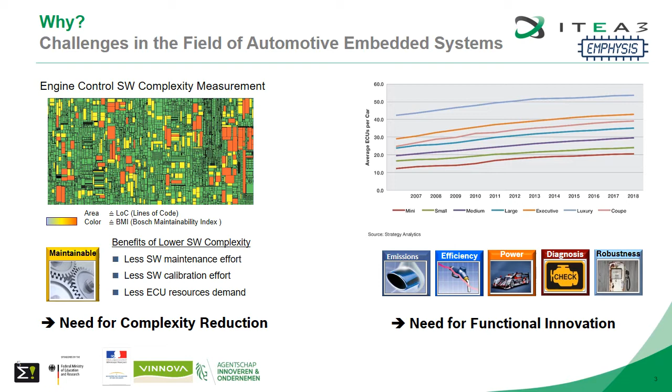The motivation for Bosch Corporate Research to initiate this project back in 2015 was driven by the business needs expressed by our industrial partners in the Bosch business units. A growing software stack whose complexity has become a threat in terms of maintenance costs and the limiting factor for new innovative functions for systems of an increasing complexity. New ways of developing embedded software in a faster and more sustainable way was the ambitious project goal.

Starting point of the eFMI approach is the observation that understanding how things work is fundamental for developing successful products. Modeling and simulation has been used over decades to build up and utilize this knowledge. Thousands of engineers at Bosch leverage simulation techniques to build the high-quality products we are selling worldwide.

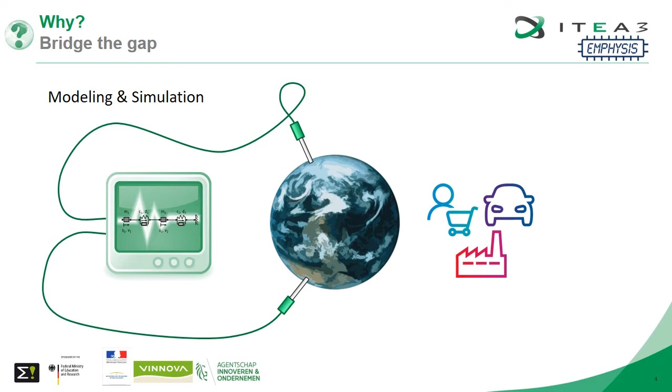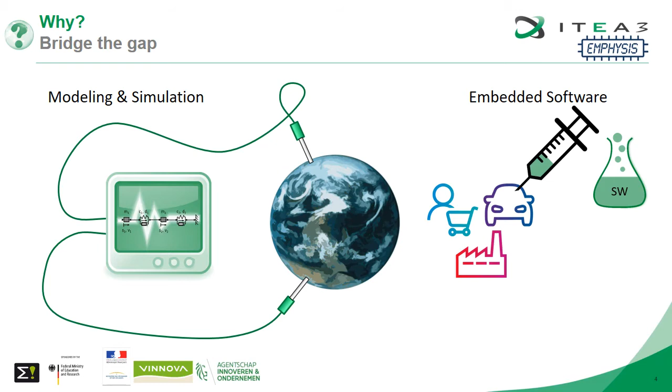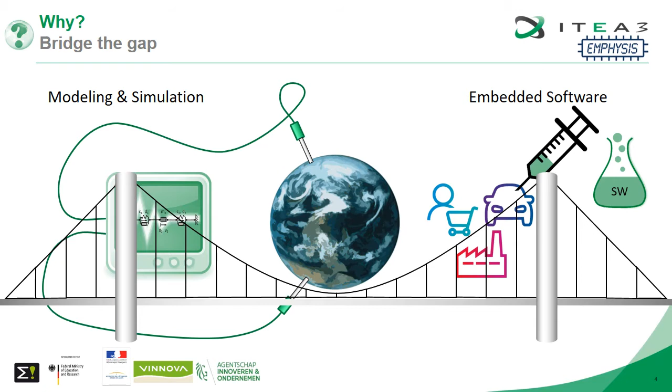With code being the fuel of the 21st century, software has become a driver for new innovations for smarter products. Finding ways to dissolve simulation models into software to inject them directly into the products is the key to derive advanced functions faster. Bridging the gap between the modeling and simulation domain and the embedded software world is the core idea behind the EMPHYSIS project, leading to eFMI as new exchange format between these domains.

The idea has not only been specified on paper in form of the eFMI specification, but also realized by a large number of tools, from modeling tools over ECU code generating tools to validation and verification tools. With 13 tool prototypes at a high level of maturity, one could say that eFMI is already established before it's even officially released. The developed toolchain has been thoroughly tested and cross-checked. An eFMU compliance checker is available open source for everybody to verify their own implementations against the standard.

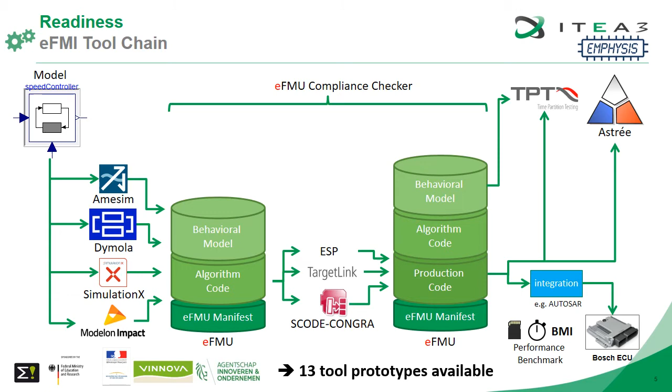Key for Bosch was to assess the quality of the generated code. It was obvious to us that compromising on runtime performance and resource demand would undermine the user acceptance. A better productivity through an automated process was considered acceptable at the cost of plus 25%. 6 test cases have been defined by our expert embedded software developers and manually implemented to be the baseline for the benchmark of the eFMU code, evaluated on a real Bosch MDG1 control unit.

As a result of this assessment, the auto-generated code in all cases reached the KPI of less than 25%. And to our surprise, it even outperformed the hand-coded solution in 5 out of 6 examples. This is a technically outstanding result.

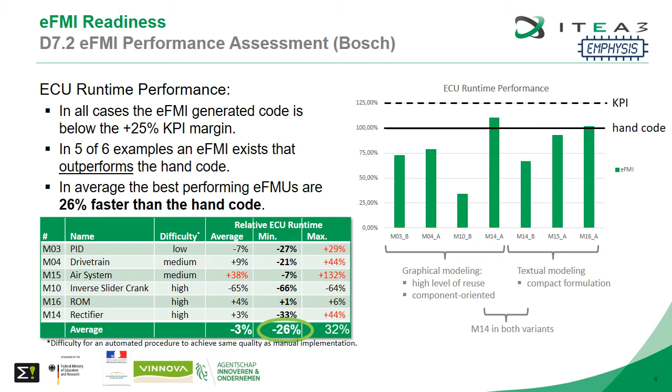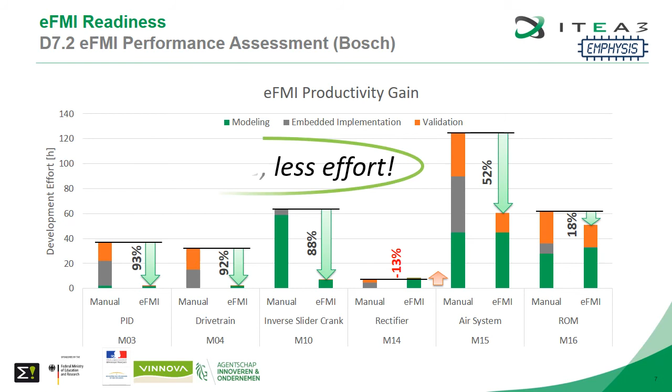Furthermore, the working hours have been counted for both the eFMI workflow and the state-of-the-art manual implementation. As a result, it could be shown that especially for the examples taking advantage of a high level of reuse based on Modelica libraries, a tremendous gain in productivity can be achieved. Bottom line, eFMI enables better code with less effort.

Over the course of the project, 9 demonstrators have been developed to showcase and evaluate the industrial-grade readiness of the eFMI toolchain. The impressive results include a wide variety of physics-based state estimators that convinced not only our industrial partners, but also the ITEA review board to consider the EMPHYSIS project with excellent ratings.

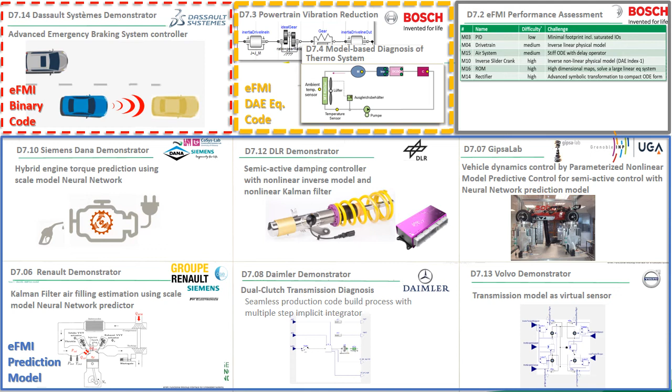Finally, we are looking forward to the ITEA award ceremony in September 2021, when the EMPHYSIS project will be honored with a Vice Chairman Award of Excellence for outstanding results in all 3 categories: innovation, business impact, and standardization.

This brings us back to our initial goals. As briefly outlined in this talk, by tearing down the walls between physical modeling and embedded software, the overall productivity can be largely improved. The eFMI workflow helps to manage complexity better by separation of concerns and allowing to manage complex systems on a higher level of abstraction. Finally, all this is an enabler of new software innovations for suppliers and OEMs to sell more and more advanced functions, and to vendors to be among the first to provide tool support for this breakthrough technology.

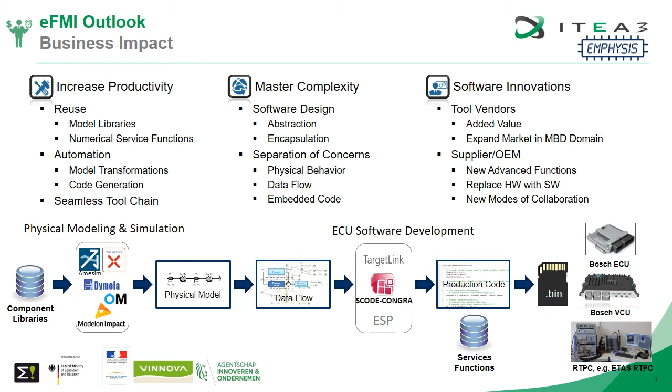As a closing note, I want to refer to what the members of our OEM advisory board said. These positive statements encourage us to expect a strong market pull for eFMI, so that in a couple of years from now we can truly say, yes, eFMI has revolutionized the model-based development of embedded software.